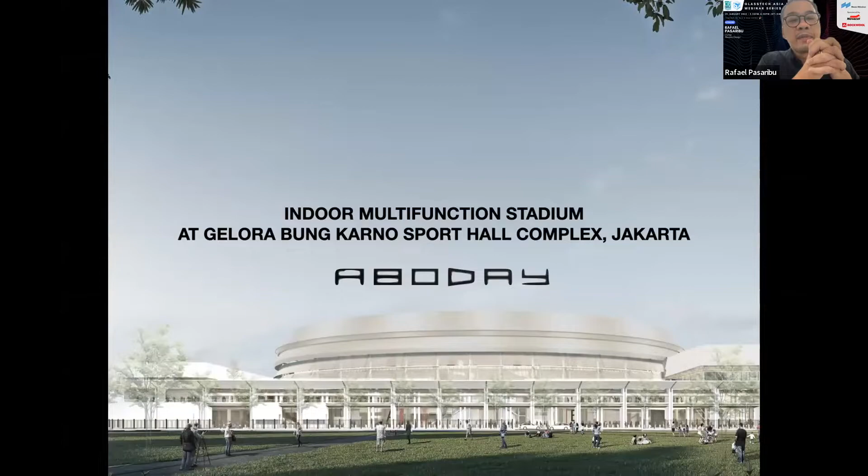Today I will present the new indoor multifunction stadium at the sport complex located at the center of Jakarta. As background, this is a fast track project commissioned by the Association of Basketball of Indonesia and the government of Indonesia, due to an event in August 2023 that will be co-hosted by Japan, Philippines, and Indonesia. I haven't got any idea yet whether the final will be hosted in Philippines or in Jakarta.

What you see right now is the progress currently ongoing with the construction on site. You see the building here. Selections of materials right now are being discussed. What I present to you may not necessarily be the final selections chosen by the contractors.

How we deal with government projects here is quite different from other countries. We do the basic engineering design, then there is a schematic design, and after that we handle things differently, whereby another consultant is commissioned by the contractors to continue our work.

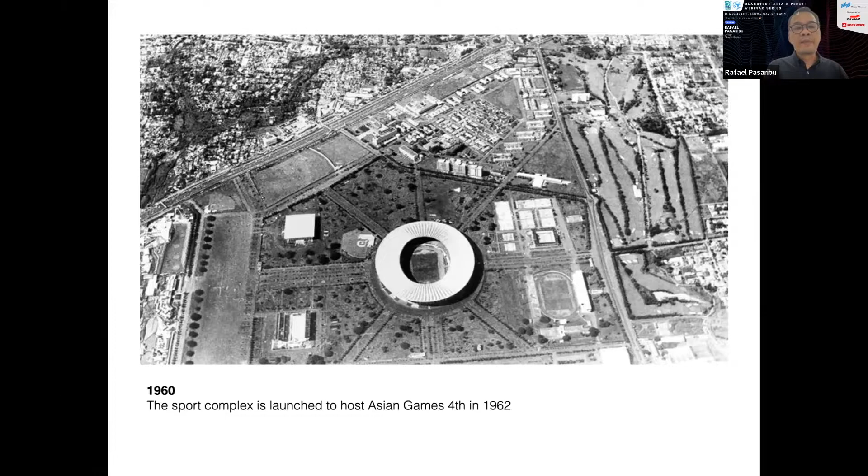In the 1960 view, we still have much greener structures, because this also acts as what's called the green lung of Jakarta, which currently has less than ideal numbers. The government then tried to recover the green area based on other facilities they can recoup from their inventories.

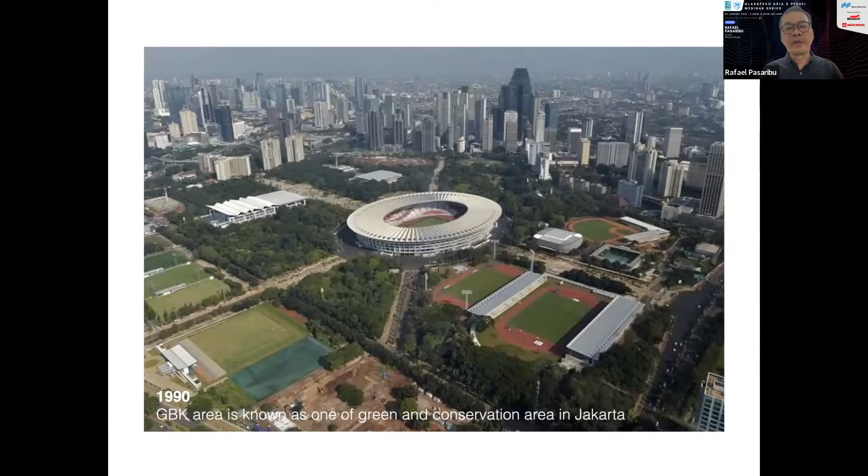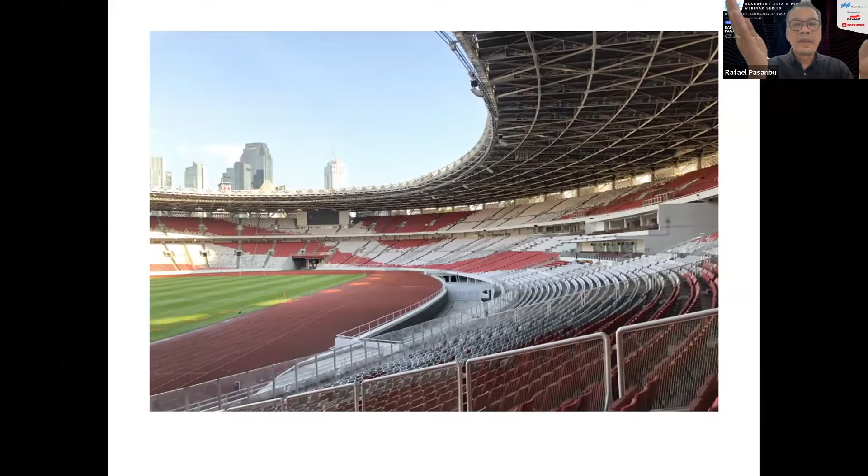Because this was commissioned by the first president, the whole structure here is considered a conserved area - preserved - even though we have a lot of renovation works for the Asian Games event, we try as much as possible not to intervene with the character.

That is basically what we are going to do with our new building, because this building would be considered the first and last structure in this sports complex. The architects, part of the Heritage Association, basically had objections to having a new structure here, but because the location is very strategic, the government decided this would be the best decision, regardless of whatever controversy may arise later on.

We try to create something very short in time, but meeting international standards, especially from FIBA. We came up with something of two massings - basically the top and the bottom.

The bottom, or the podium, reflects the current structures' character. We have a couple of structures that basically contribute to the character we have for the podium.

But the top, the head of the stadium, basically represents the craftsmanship. We try to create a narration whereby craftsmanship is part and parcel of our daily life, which will make people easily relate to the building, easing the controversies very much among the local folks.

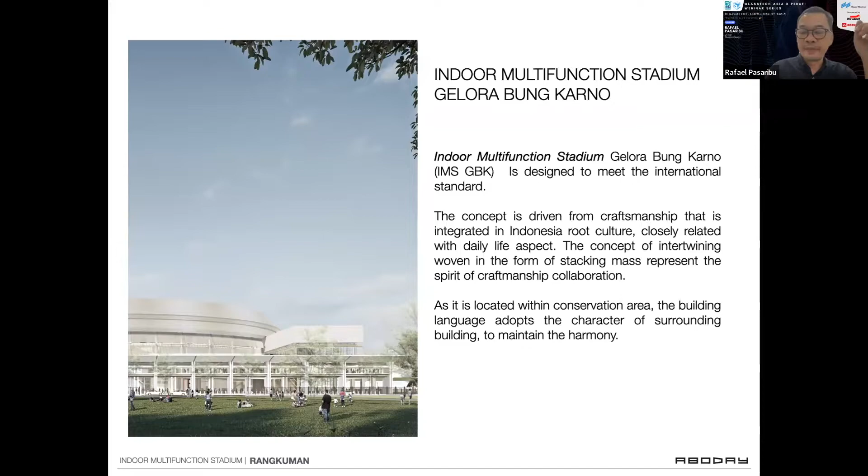What we have right now, the building will be on the northwest of the main stadium. We have a lot of facilities after the fourth Asian Games and the last renovations, but basically this is the only structure allowed based on consensus.

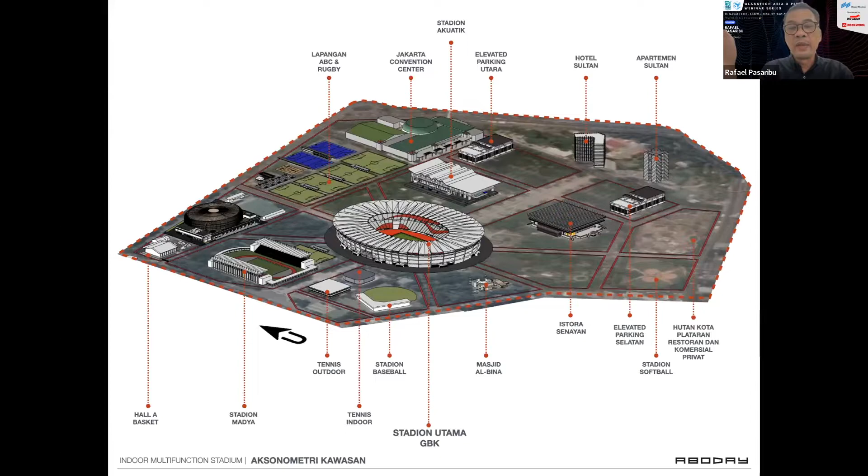This is given by many stakeholders - this is the first story plan. FIBA, as with other stadiums that are designed, usually has very strict zones. On the left side is services, and also the parking area for the athletes.

The lower part, where we see the orange color, is basically for the public - an open plaza where we have escalators on the left and right that lead people to the lobby and the second floor. The green area is for the executive parking.

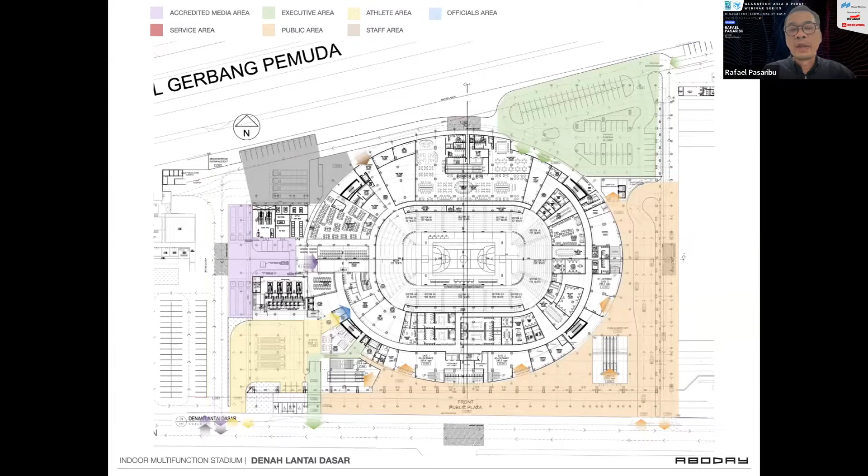Whatever event supporting facilities will be hosted at the ground floor, including the media, changing rooms, and so on, along with the official rooms and executive lounge. Coming into the inside area, the red color represents the MEP equipment, and this is basically the supporting facilities for the playing field.

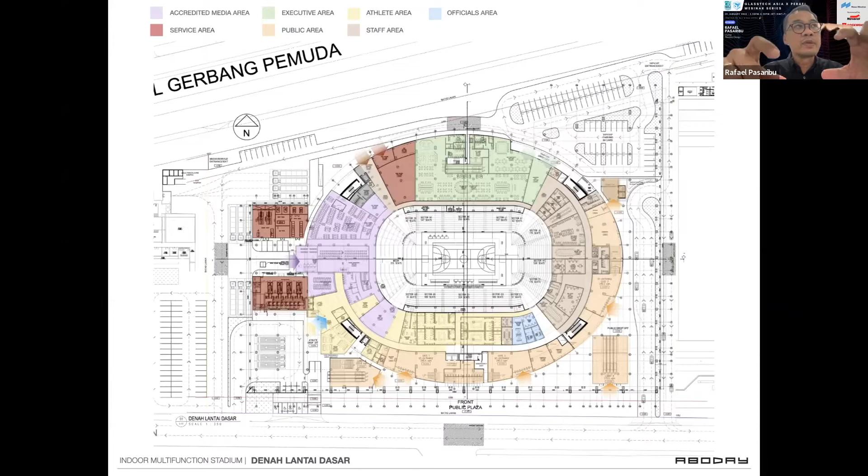We designed this with consideration that not only basketball could be hosted, but also ice hockey and other indoor sports. Second floor is where the tribune starts.

The tribune starts basically there, and part of it is accessed from the second floor, but going into the first story it becomes retractable, telescopic seating. Others are corridors at the perimeter rings, and from the corridors we enter the tribunes. We have two training fields on the left side, commercial areas in blue on the right side, and yellow is where the public will access the internal corridors.

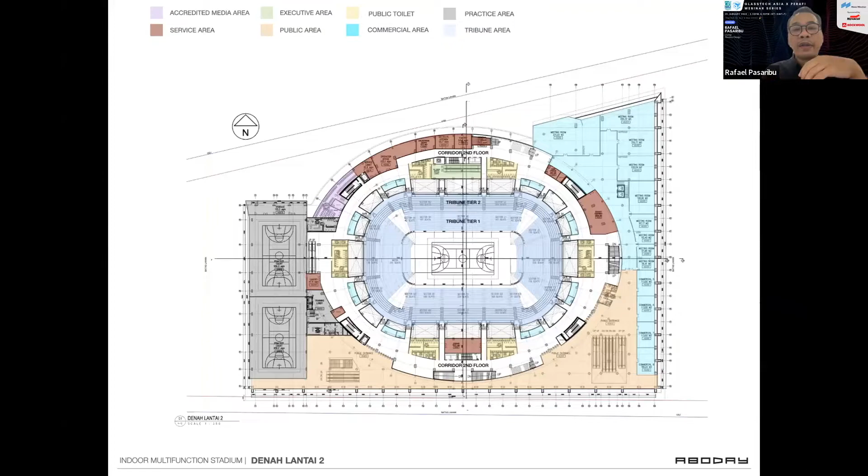Following our ongoing discussion with the appointed consultants, there have been some changes—if you see this drawing—to the core of the lift core and the staircase core.

This is the third floor, where we have the executive boxes. Executives, basically the presidents and so on, will stay at this third floor, and the circulation of the third floor will be isolated from public access as part of the requirements.

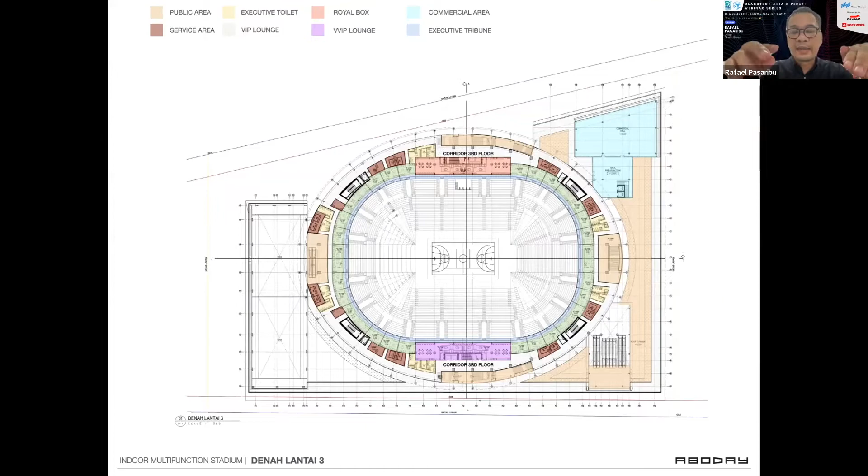This is the fourth story, where we can see additional massings on the left and right that will act as a place for MEP equipment.

And this is the top, showing the numbers of tribunes.

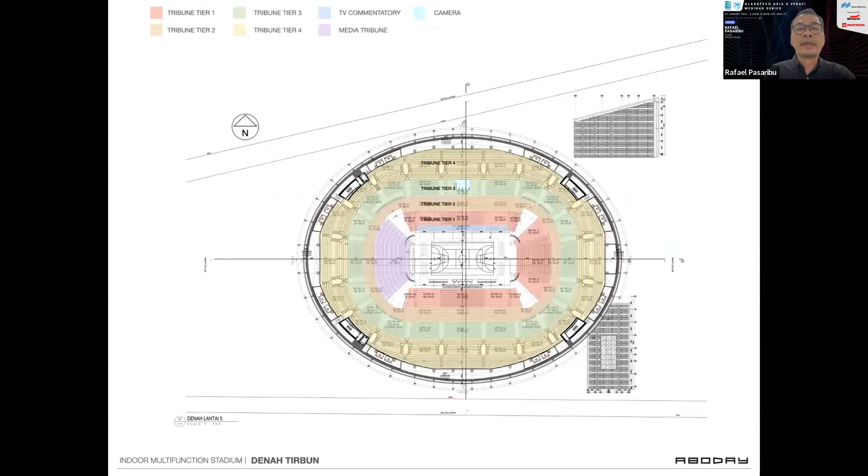So these are the buildings from the north and south. The north facade will face the national broadcast televisions, and the south elevation faces the main stadium. There are two different considerations, because people will be coming from the south elevation.

Now the south elevation podiums need to tie back with the surrounding character. At the top, we have two options for the finishes: one is aluminum panel—not aluminum composite panel, but aluminum panels—and the other is stretch membrane.

Some of it comes with the brand Ferrari and so on, as it is a translucent material that allows views from inside to outside, and also allows transfer of air, because we were asked to make this building as energy efficient as possible.

That's why the corridors at the fourth floor and part of the third floor will be naturally ventilated. To achieve this, if it is aluminum panel, it will be perforated; if it is stretch membrane, like the fabric from Ferrari, then it is already a breathable material.

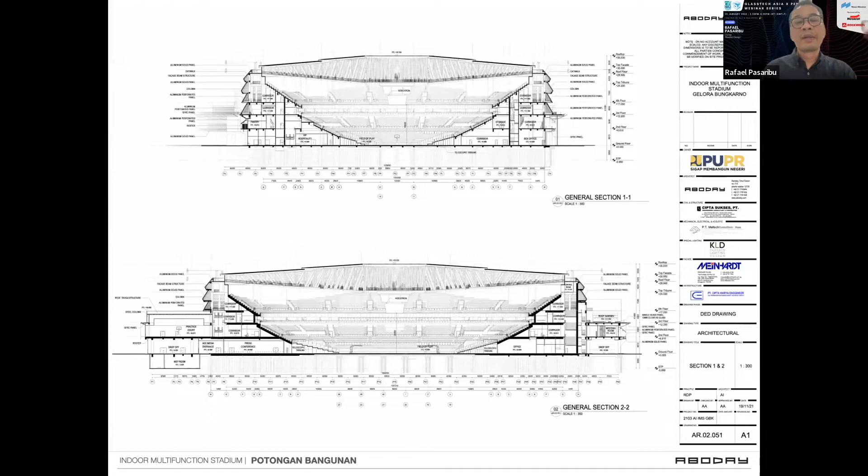So if we look at this, how the building works is quite straightforward.

With a 16,000 capacity seating for the stadium alike, this is the most compact footprint ever, at about 15,000 square meters GFA, while others start at least 70,000 square meters and beyond.

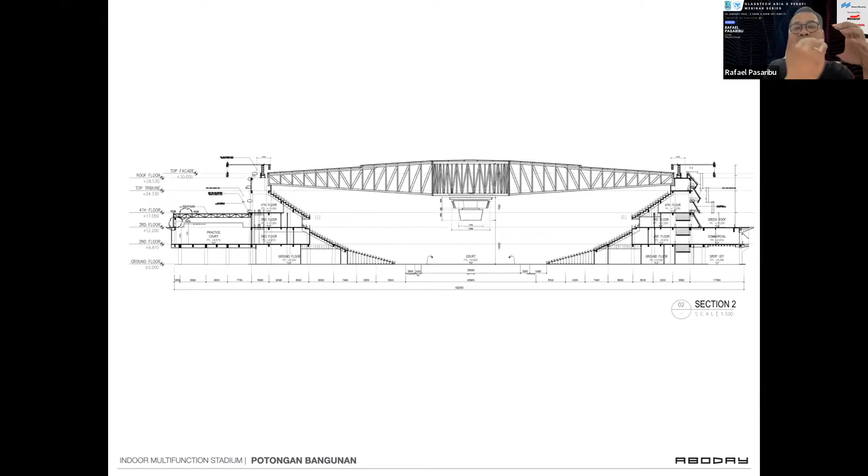We are constrained by the size of the location, which is why this is very compact. Still, whatever we put here adheres to the international standard given by FIBA.

So this is the skin sections, allowing some maintenance access at every skin level for easy maintenance. We still provide access from the top for gondolas, but prefer to have access at every level of panels.

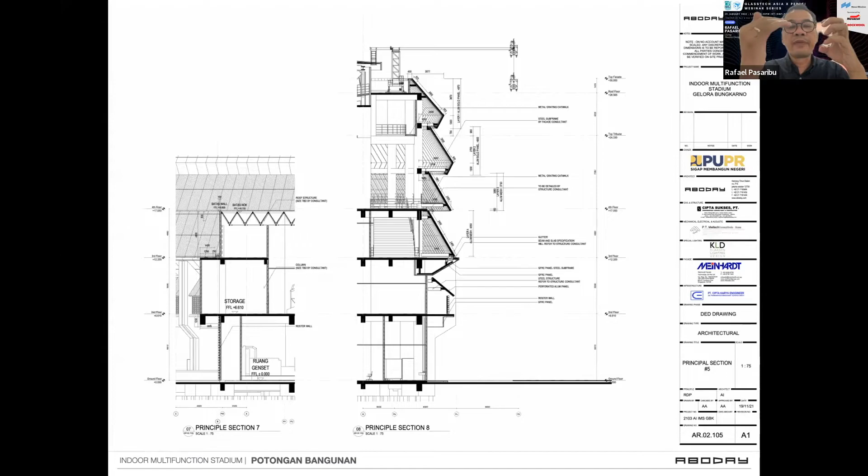So these are more detailed sections of how the elevation and panels work out. We worked with Meinhardt as our facade consultants, which is why the idea is to use aluminum panel directly, not composite panel.

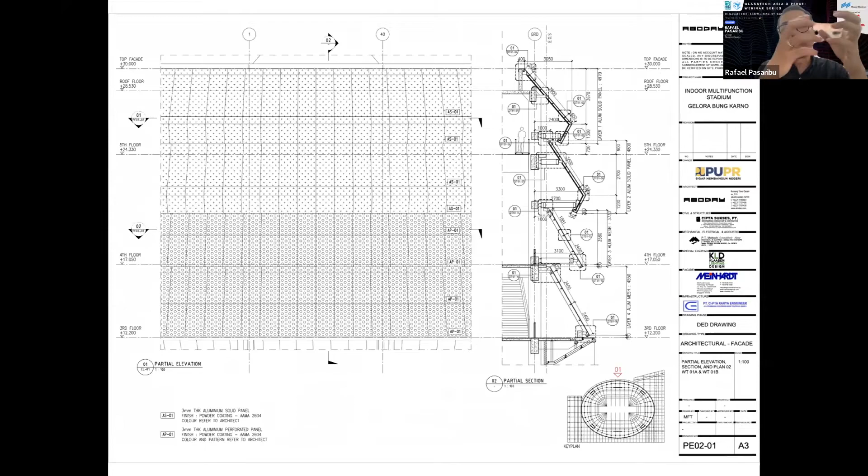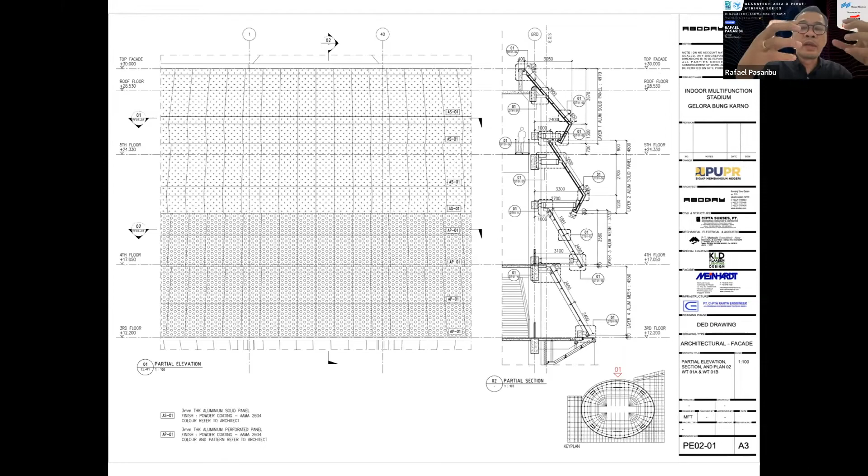So it needs to be sourced from suppliers, and there is some benefit given by the aluminum panels. Notably, we had an incident in Jakarta where one of the government buildings had a fire, partly contributed to by the use of aluminum composite panels, which use non-fire-rated materials.

The issue here is basically we try to avoid, because the authority asks us to really concern about selections of materials. So that is one constraint that we have here.

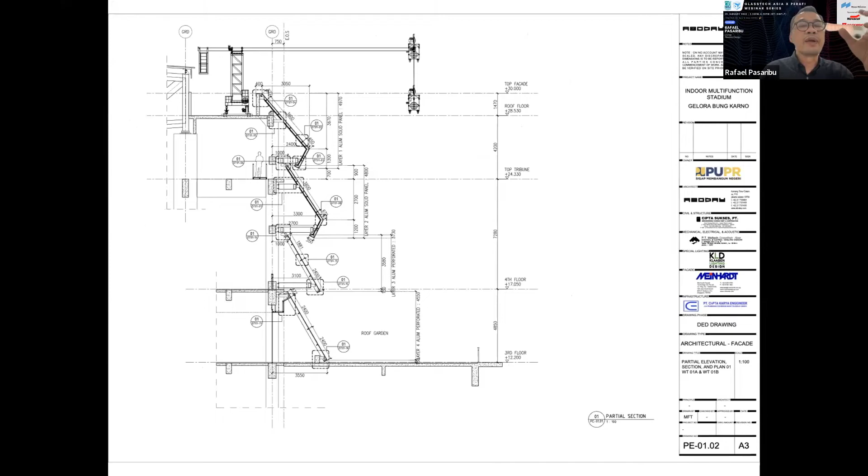Okay, this is another view. This is one panel, about 3 meters by 3 meters by 1.2. Some views here that we see.

So with this natural ventilation situation, we try to borrow as much as possible the lights from outside.

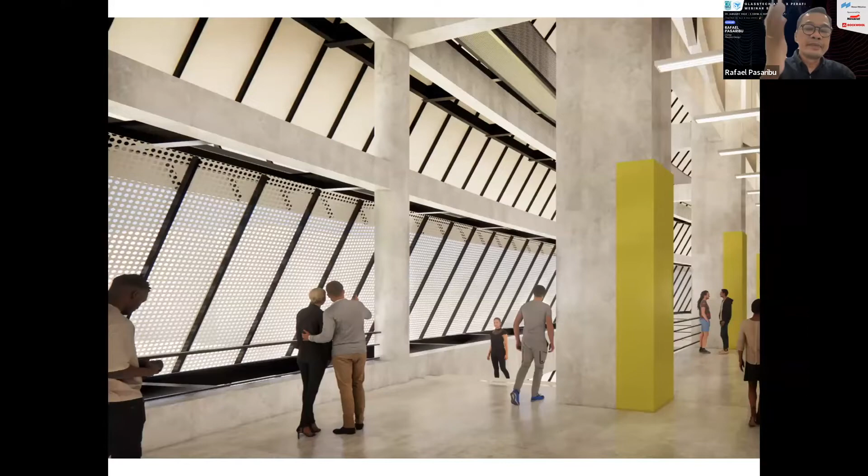The sports complex official requires us to create a building that is zero maintenance. To us, there's no building which is zero maintenance, but minimum maintenance, yes, because zero maintenance means you don't come up with a budget to maintain the building, which is a big question. None of the materials in Jakarta so far that I know, even glass, after several years, because they don't provide coatings, some stain happens because of lack of maintenance and so on. So yeah, maintenance is still required for these buildings.

Some other views on other areas. So we basically take out whatever unnecessary constructions, just leave it bare essentials for the building to perform.

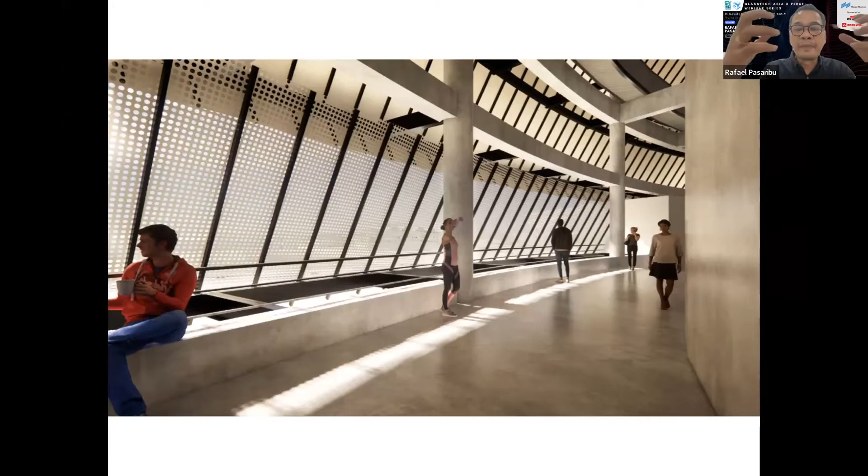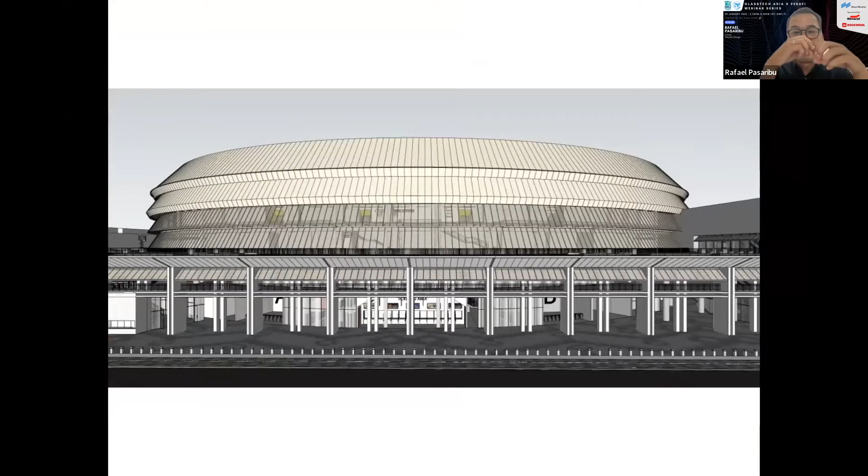This is a zoomed view, you can see the scale of the panels compared to the person sitting there. The elevations, if we actually put in real use, we can still see whatever structure is behind the screen. But at the top two, we use solid panels instead of screen because there's no necessity to provide cross ventilation at the top, since it's part of the utilities.

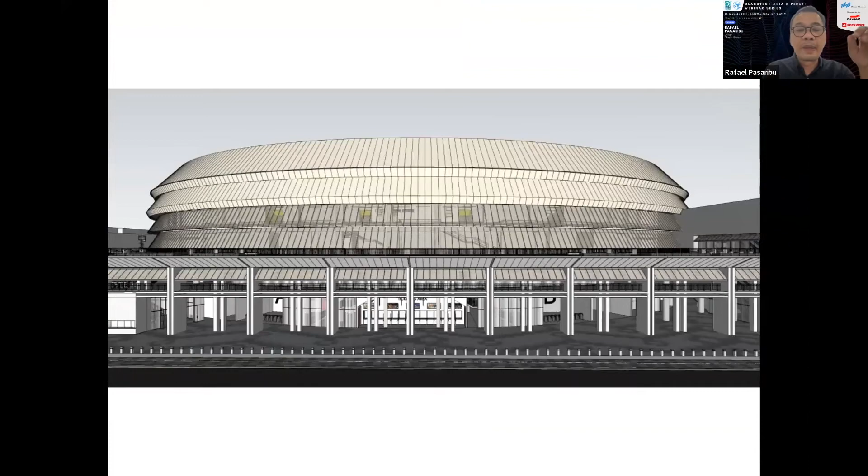Some view below, you can see the structures that come from the existing building. So that's basically the contributors to what we have.

We have a very modern approach in the beginning, with some free structures, columns, metals, but then we were challenged by the heritage considerations, and because if we don't get their approval, the building cannot go to construction stages.

So we have very interesting characters from the existing building here, but not everything can be replicated, so we just borrow the column characters and so on.

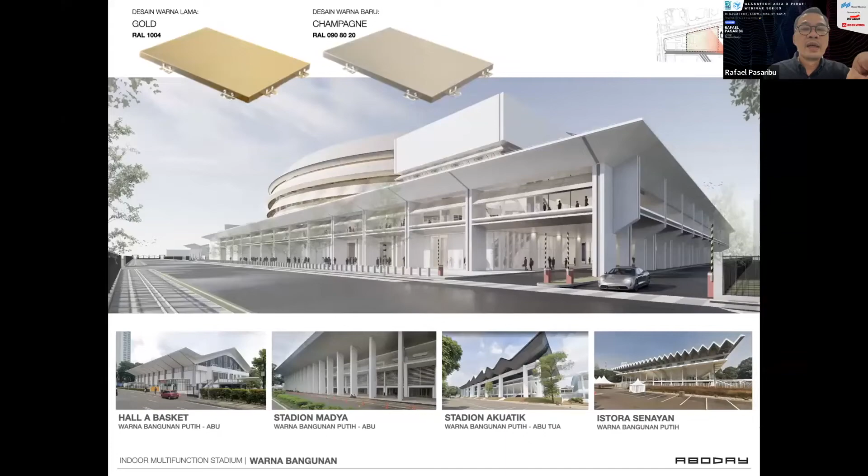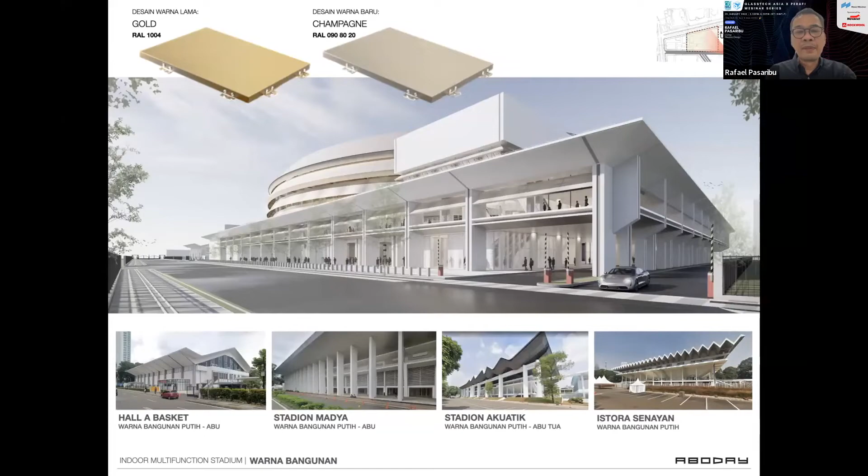The panels, the colors that we choose, are also controlled, but we insist on having the champagne gold color as an accent to the narration we built, that this is a craftsmanship with this bamboo color imbued. That also makes a statement that this is the first and last building constructed after several years, being part of the modern character injected into this area.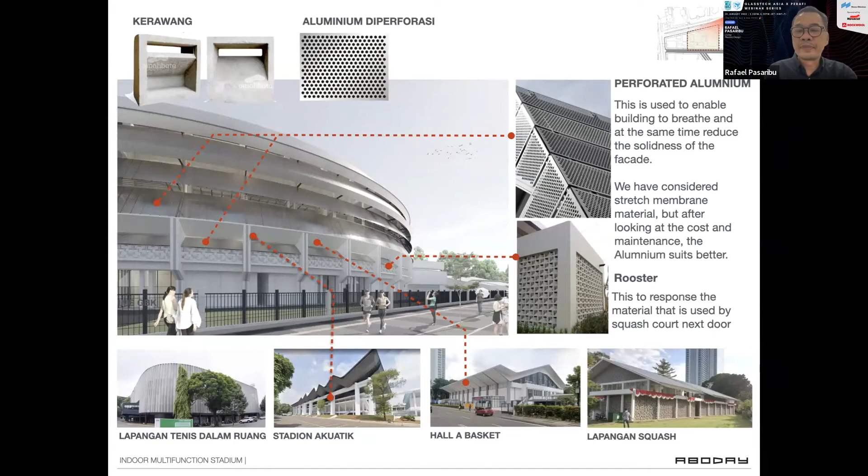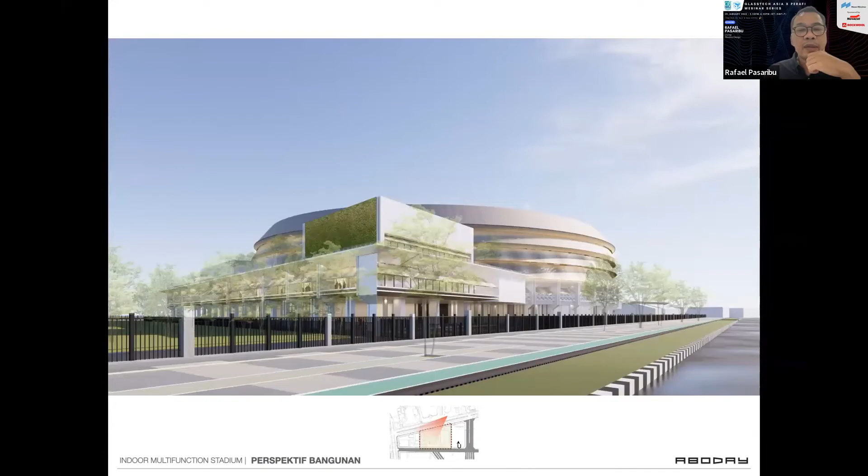This is the view from the south. This is from the main road. Some kind of features like a green wall and so on is introduced here.

Formally, they wanted something more commercial oriented, just like a billboard, but then the heritage also thinks that may jeopardize the whole mood of the area.

We insist on actually taking out the fence because we feel this should be a permeable space, people are invited. But then there are some security concerns, so that's why they still want to retain the fence here.

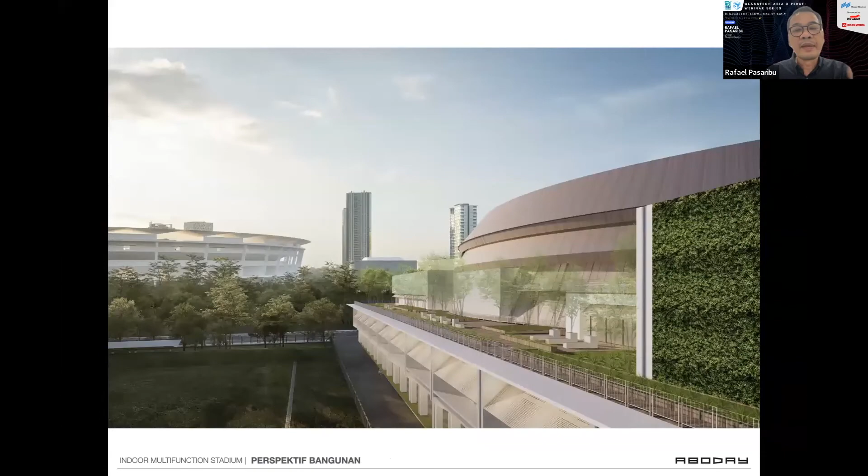The view towards the main stadium. Some area on the roof is required to be green, or the exercise facility needs to come with green.

Basically we introduce the commercial area at the rooftop so people can go around and enjoy the greeneries provided. If this is just greenery, I don't think people will come up to this level and do something. But if there's a sense of destination, we create a hall at the third floor here on the further right, which basically makes people want to go up during an event.

Some lighting is provided for the building. We try not to make it too much color fanfare and so on, because again, the whole sports complex is very much controlled by the authority.

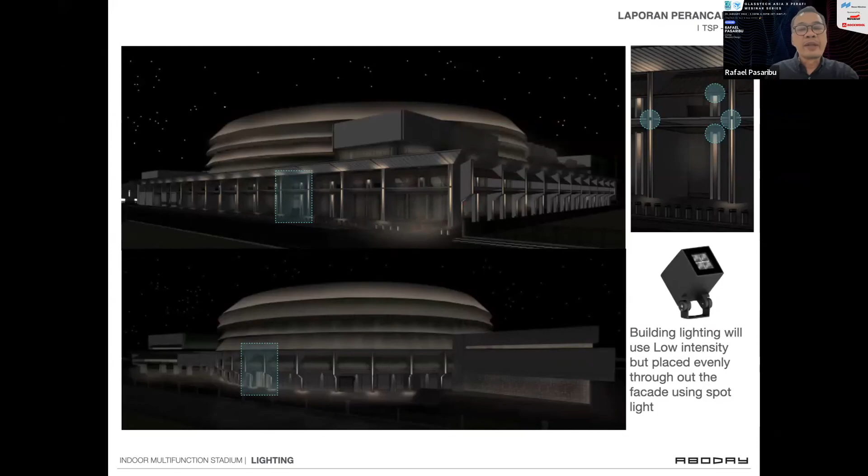So thank you for the time provided to me. I hope that this is something that can contribute to the community. Thank you.